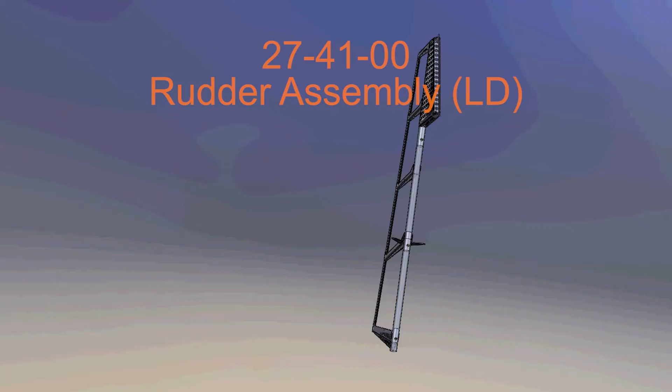In this episode, we're going to assemble the low drag rudder assembly. The estimated build time for the low drag rudder assembly is from 2 to 4 hours. The rudder assembly components are manufactured using a CNC match drilled system. This ensures a proper fit, easy assembly, and minimizes construction time.

In the previous episode of Building the EMG6, we assembled the rudder spar subassembly. We did this by inserting 3 inserts into the spar, positioning them, and riveting the rudder hinge nut plates in place to hold these inserts. The construction procedures assume that you have completed these steps or have purchased the pre-assembled rudder spar. To get started, we need to have an overview of what we're going to be working with.

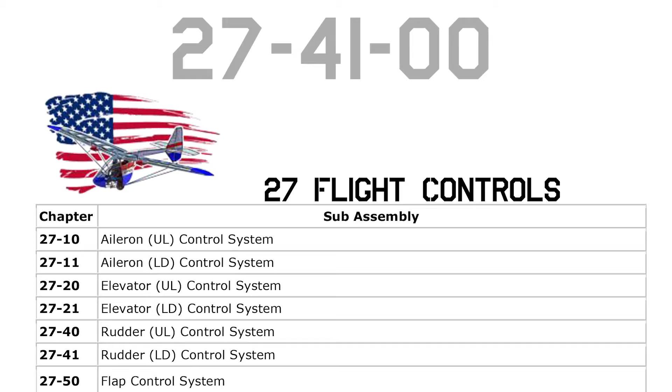The part numbering sequence in the aircraft uses a version of the ATA code. The first 2 digits in the numbering code system identify the primary segment of the aircraft. In this case, 27 indicates that this is part of the flight control system. The second 2 digits indicate in the part numbering system the primary subassembly. In this case, 41 is the code for the low drag rudder assembly. The remaining digits identify the individual parts within that subassembly.

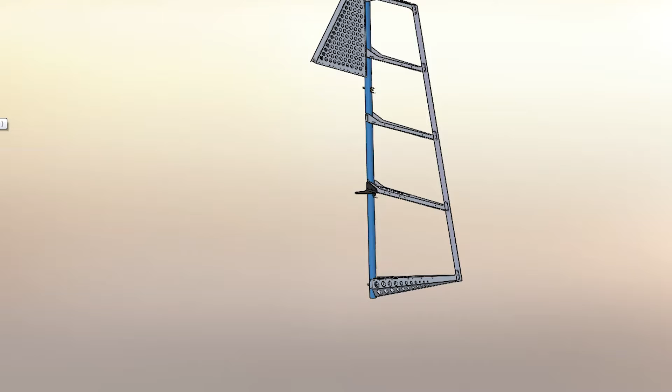So let's go over each part individually so you can get an idea of the makeup of the individual parts within the subassembly. Dash 10 is the rudder spar. Dash 50 is rib number 1 located at the bottom of the rudder. Dash 51 is the number 1 rib support, which ties the 2 legs of rib number 1 together, forming a box structure. Dash 65 is the trailing edge.

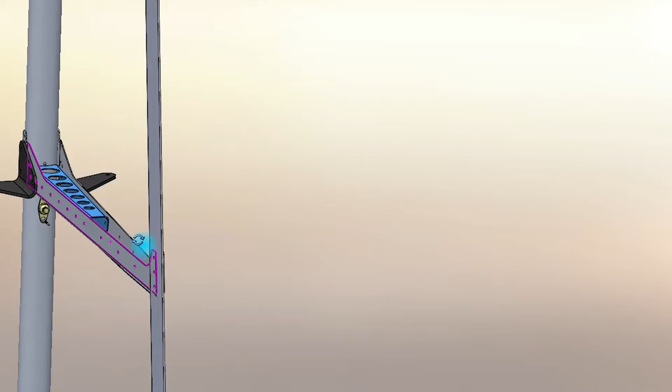Dash 53 is rib number 2 on the left side, and dash 54 is the number 2 rib on the right side. All of the remaining ribs aft of the spar are made up of both a right and a left side that are riveted together. Dash 55 is rib number 2 support, which forms a box structure for the control horn to attach to the rudder assembly. Dash 20 is the right and left rudder control horn assembly, which will be bolted to the frame after covering. Dash 56 is rib number 3 left. Dash 57 is rib number 3 right.

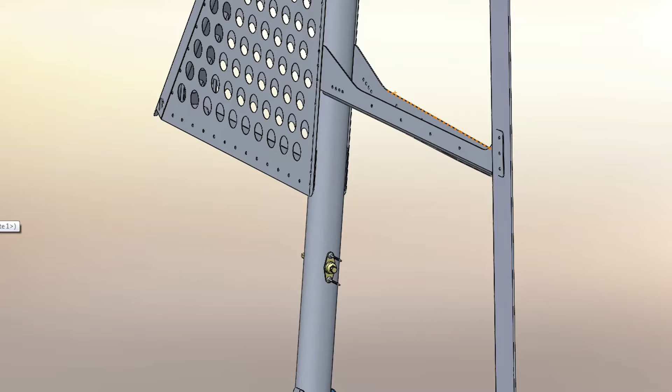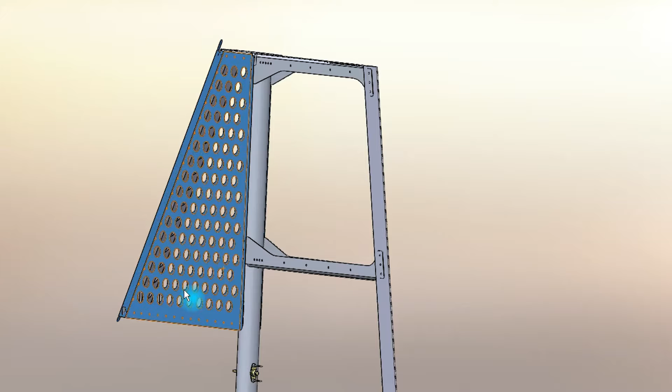Dash 58, rib number 4 left. Dash 59, rib number 4 right. Dash 60 is rib number 5 left, and dash 61 is rib number 5 right. Dash 76 is the leading edge sheet metal with multiple lightening holes in it. Dash 72 is rib number 6, which is the rib for the leading edge top, and dash 73 is rib number 7, which is the rib for the leading edge bottom.

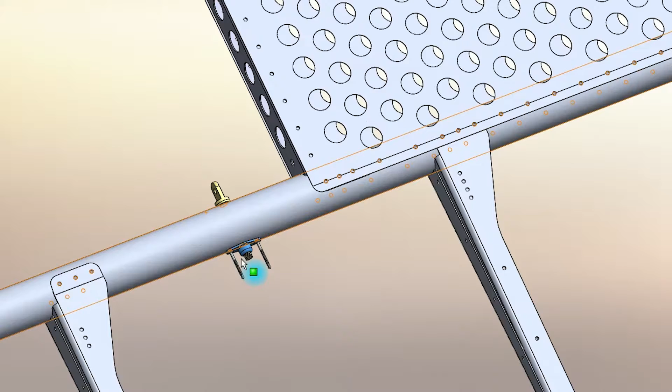Within the spar subassembly, we have a few more components. There are 3 each of the MS21078-4 nylock nut plate, and then we have 3 AN960-416 1/4-inch washers and AN43B-20A eye bolts, and these are the eye bolts that form the hinges for the rudder assembly.

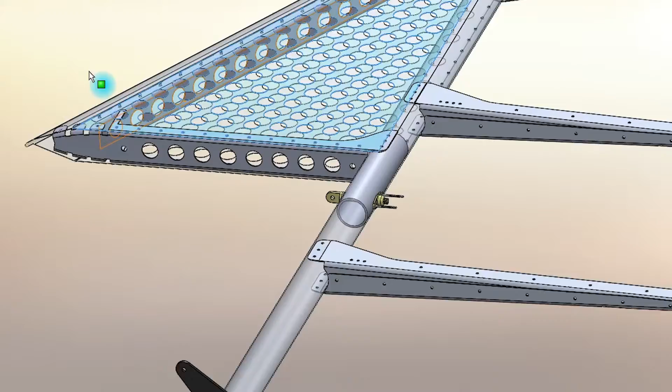The rudder spar assembly includes the dash 10 rudder spar, and then dash 12 the rudder mid support, dash 13 is the rudder spar lower support, and dash 14 is the rudder spar upper support. And last but not least, we have dash 77, which is the leading edge spar.

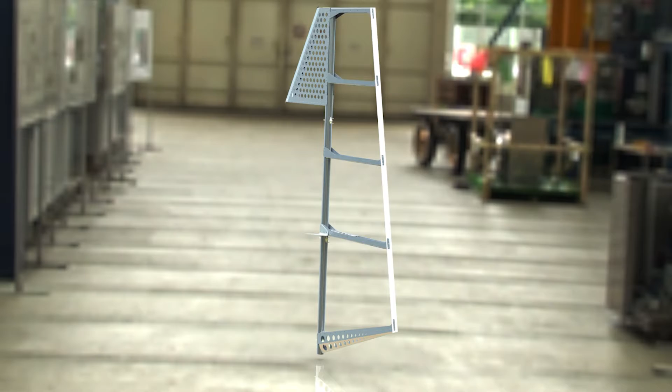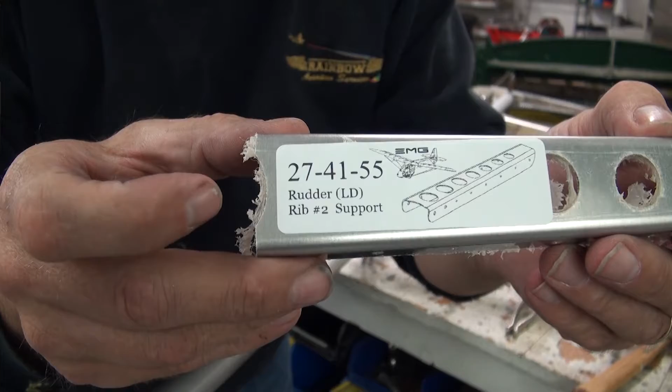Now that we have an overview of the rudder assembly, let's talk about a few builder's notes. There will be multiple drawings that you will want to reference, all of which are available in the builder's database under Chapter 27-41. All of the components in the rudder kit have an identification label which identifies the part number, which includes a subassembly for which each part belongs to. In addition, there is a picture of the particular component on each label.

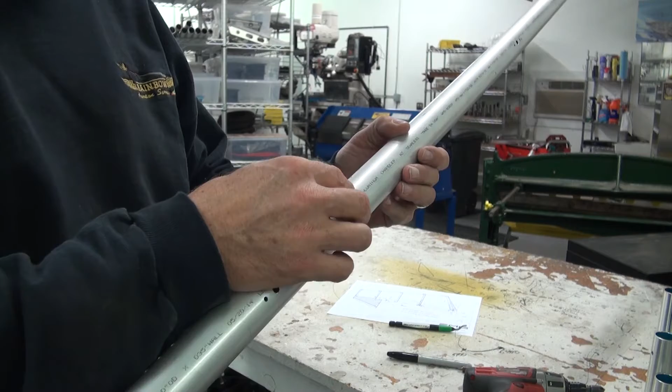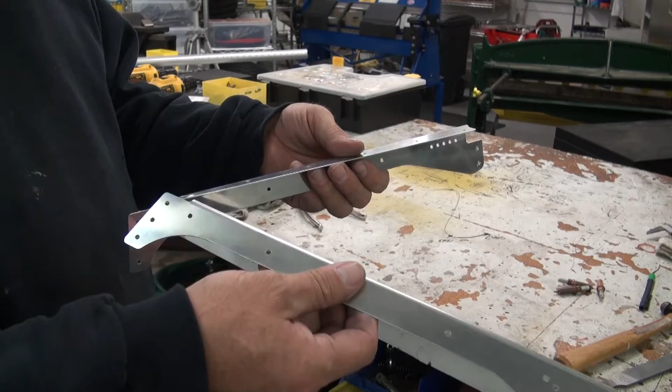Most of these labels are placed in a manner so that they're easy to remove from the component. In many cases, the label will simply come off when the plastic is removed from the sheet metal. You may find it helpful to stick the labels to the workbench as you remove each one, as they also provide a visual picture of each part number that may be helpful in identifying the parts as the labels have been removed. Ribs 2 through 5 consist of two-piece ribs, both left and right. In order to help with the orientation and identification of each rib after the labels have been removed, there is a coding system built into each rib.

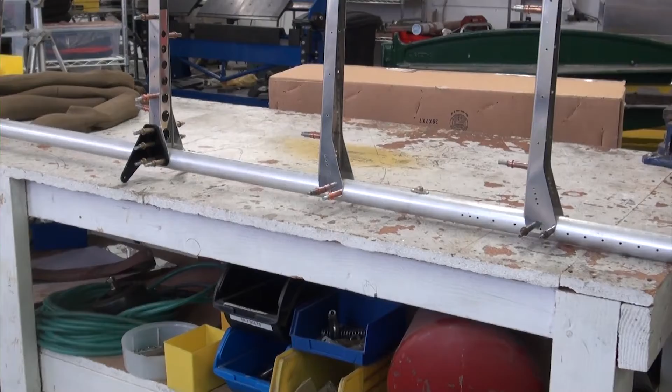Each rib has an identifier on the forward side of the rib that identifies the rib number by the number of holes that are drilled into the aluminum. For example, rib number 3 has 3 holes, and rib number 4 has 4 holes, and so on.

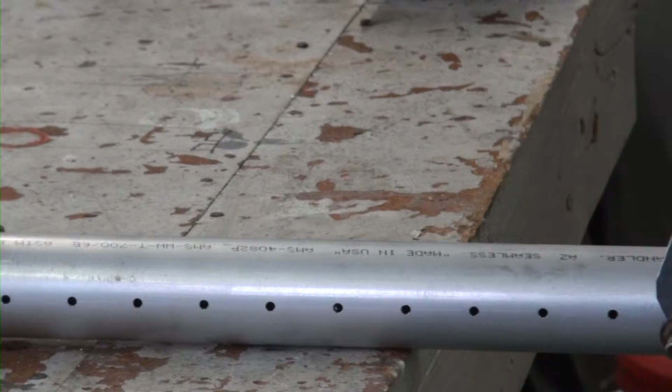In addition, the ribs that are located on the right side of the rudder facing forward have all of the identification holes drilled at an angle, whereas the ribs on the left side of the rudder have all of the rib identification holes drilled parallel with the rib.

Before we can begin assembly, we need to do one more modification to the rudder spar. Because of the radius of the bend on number 5 rib, there's an interference between rib number 5 and the top of the rudder spar. We simply need to provide a small amount of clearance by filing or sanding off the outside edges of the rudder spar.

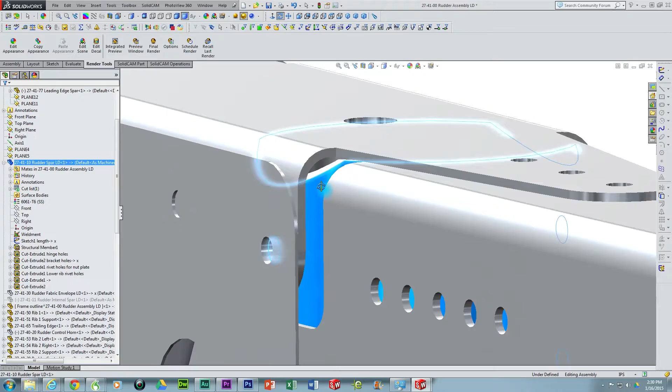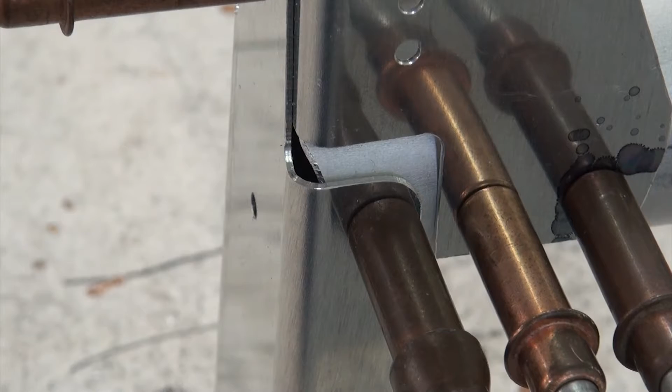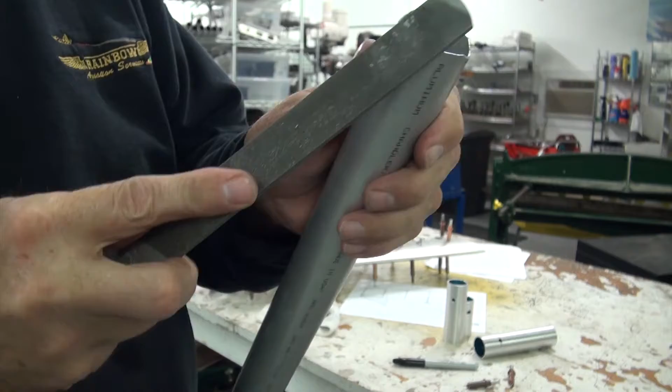A radius or chamfer of just over 1/8 of an inch will provide plenty of clearance. Once you have removed this material, deburr the end of the spar. Now that this is complete, we are ready to begin the assembly process.

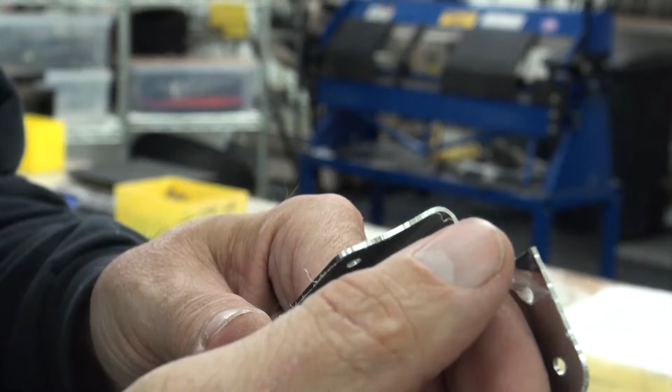We're going to start the process of assembling the rudder, starting with the very top rib, rib number 5, and work our way down to the bottom, which is rib number 1. We will start with rib number 5 working the process completely, and then we'll duplicate the process for the remaining 4 ribs. First, we will remove the plastic material from each side of the rib sheet metal piece.

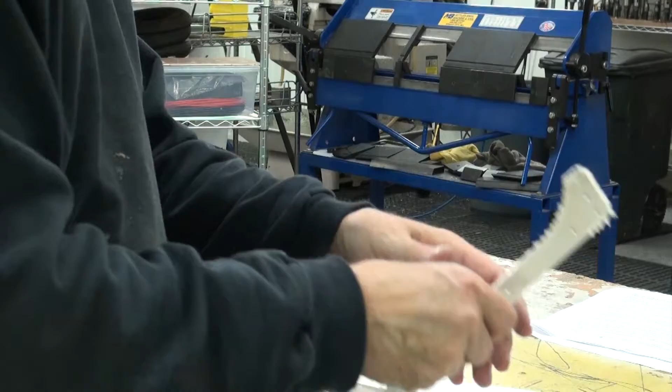You can simply grab the edge with your fingernail, peel it back a little bit, get it started, and then with a nice even pull you can get the plastic off relatively easily. Then we'll need to do the other half of the rib.

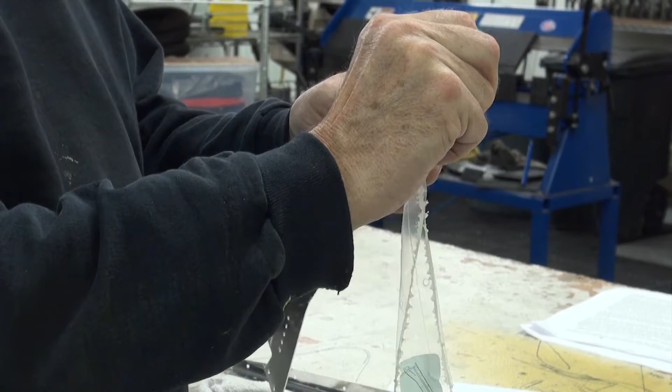Once this is complete, the next step is to deburr each one of the pieces in their entirety. There's many different methods for deburring, and you can refer to the deburring video if you need additional help with these procedures. Once we have both the right and left side of the ribs deburred, we can cleco them together to form a single rib as shown here.

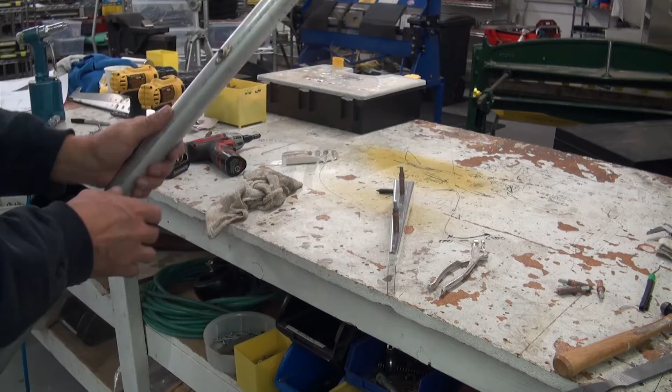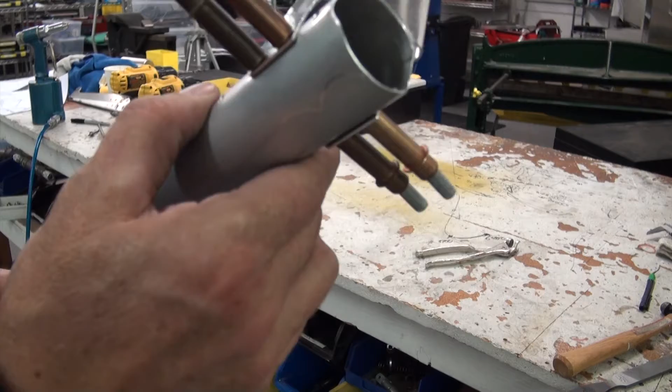Now, utilizing our spar with the nut plates oriented towards the aft portion, we can cleco the rib in place using 2 1/8 inch clecos on either side to position the rib correctly. We now have the tip rib, rib number 5, completed and installed.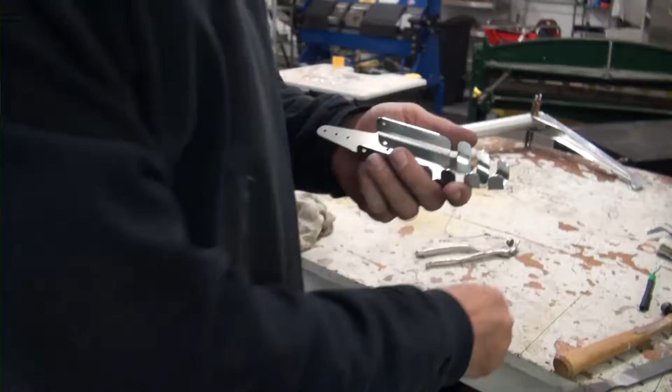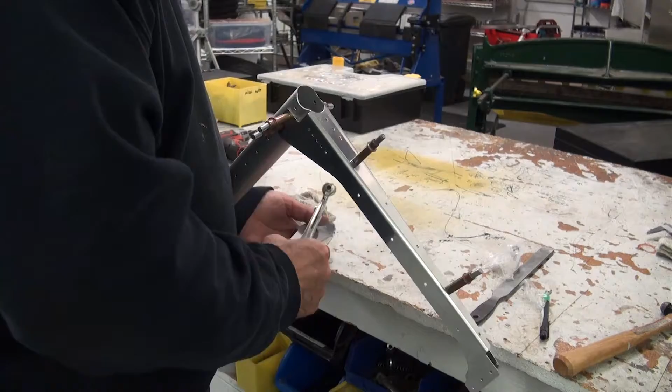It is now time to join rib number 6 to the rudder spar and rib number 5, completing the upper rib portion of the rudder assembly. Once again, we deburr the edges and the holes of rib number 6 before installation. And then we will use 2 clecos to join rib number 6 to rib number 5 on the top of the rib, and then 2 clecos to attach rib number 6 to the top portion of the rudder spar.

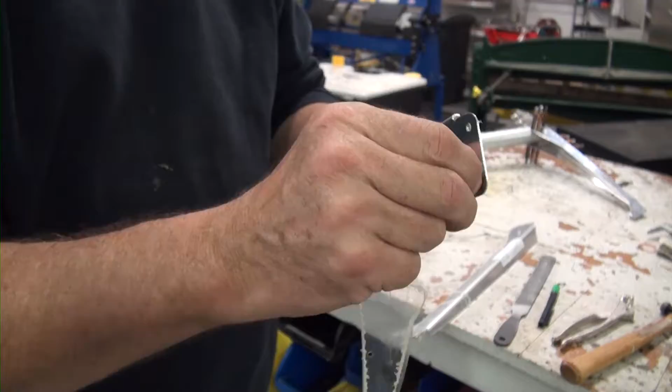Now that we've completed rib number 5, we're simply going to duplicate the entire process for rib number 4. We will identify the proper part number for each rib, remove the plastic, and then deburr both the edges and the rivet holes.

Next, we can either assemble the rib completely and then cleco it onto the spar, or we can do as we're doing in this section here, and we're doing one half of the rib at a time, and then once both rib halves are clecoed to the spar, we can rivet the two rib halves together.

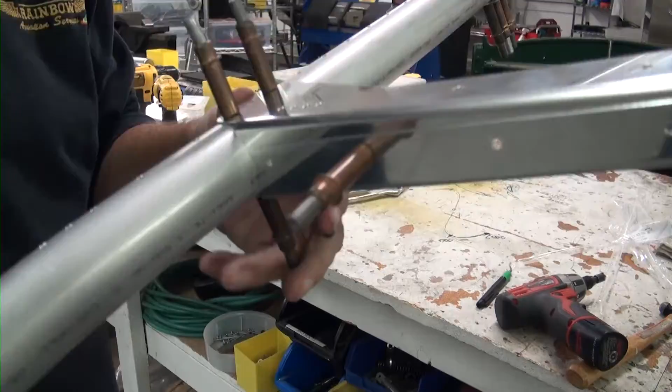Next, we'll proceed on to rib number 3 and then on to rib number 2 using the same basic procedures.

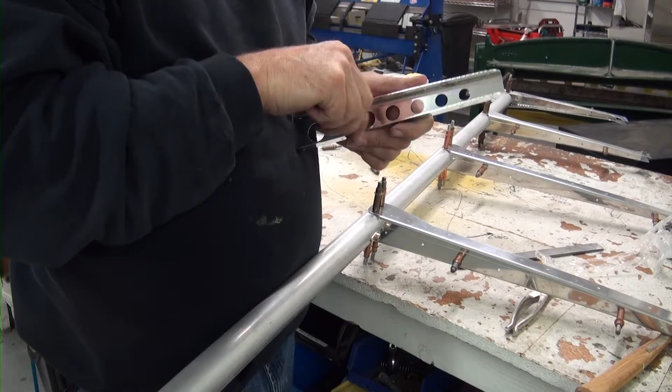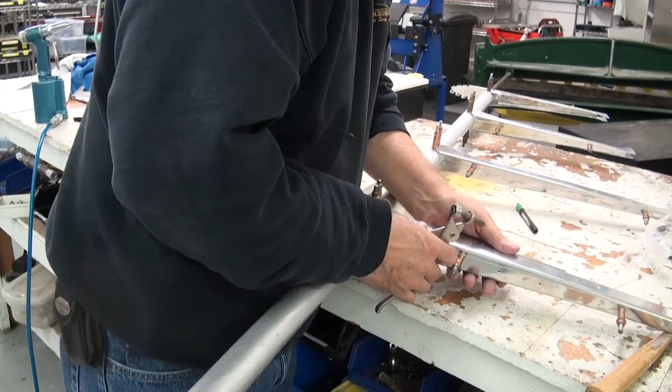For rib number 2, we will proceed the same as we have for rib number 5, 4, and number 3. But we have an additional component to add to this rib assembly. Rib number 2 has a support rib that bridges the two legs of the rib together to form a structural box that the rudder control horn assembly will attach to. We will take the number 2 rib support and prep it for installation, and then cleco it in place.

Next, we will install the rudder control horn onto the forward spar and the rib number 2. We will be drilling the spar holes with a 3/16 inch drill bit, and then the first 2 holes in rib number 2. In the final assembly, we will be attaching the rudder control horn with 4 AN3 bolts, but for now we'll simply use 3/16 inch clecos to hold it in place. The rudder control horn will be installed permanently after the rudder assembly has been covered with fabric.

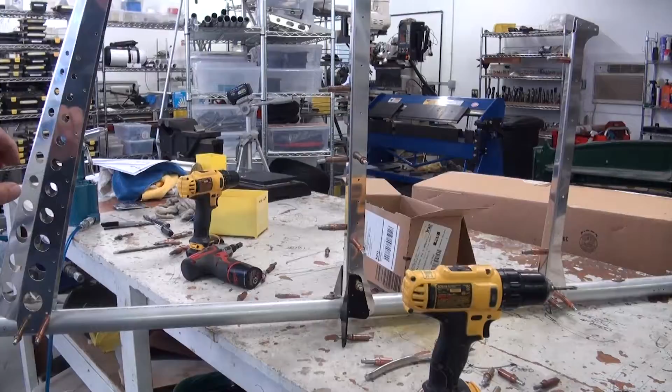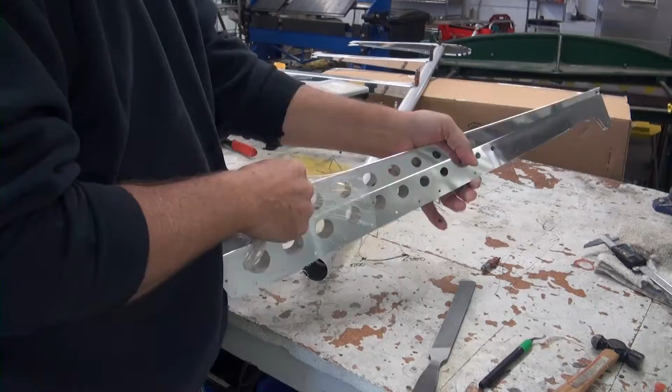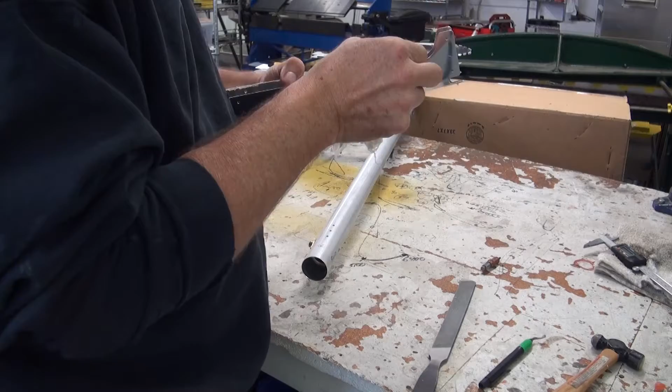Rib number 1 is a little bit different than the rest of the ribs, as it is a single piece rib that is already pre-bent into the final shape. The procedures are, however, very similar to the rest of the ribs. Remove the plastic, and then deburr both the edges and the holes in the rib.

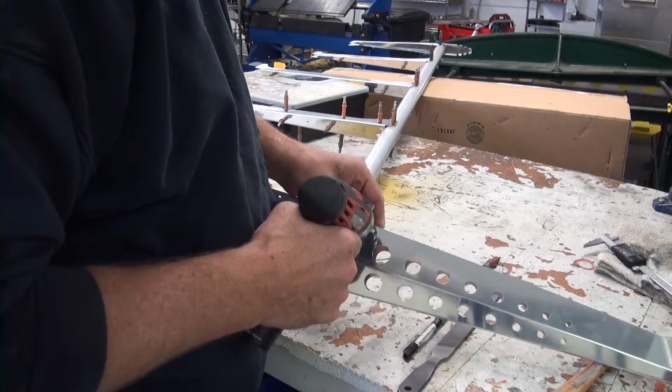On rib number 1, there is an alignment tab that is used for the manufacturing process to position the rib correctly in the CNC press brake during the bending process. This tab is intended to be cut off before you can install it onto the spar. Simply take a pair of sheet metal shears and trim the tab on the inboard end. There is an additional tab on the outboard end, however this end does not need to be trimmed. Once you've got the tab off, you should use a file to smooth and deburr the area where you've cut it. Next, we will install the rib number 1 onto the spar using 2 clecos on either side.

Rib number 1, just like rib number 2, has an internal support rib that ties the two sides of the rib together. Deburr and cleco this in place as shown in the drawings.

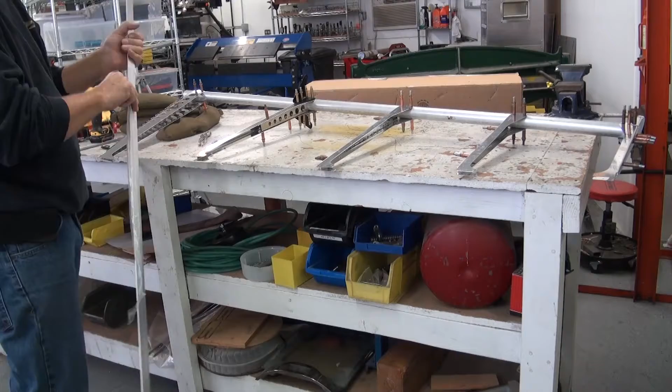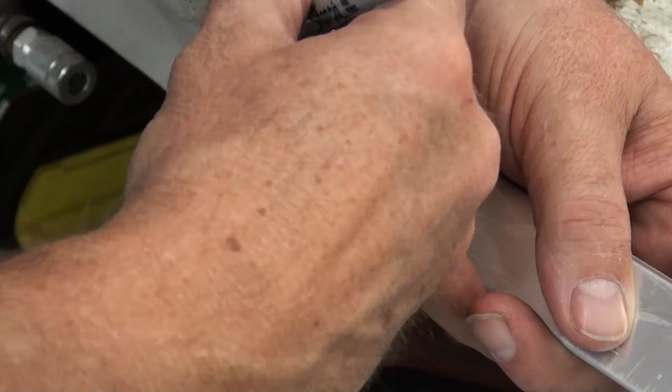Now that we have all of the ribs aft of the main spar installed, we're ready to install the trailing edge. You will want to remove the plastic from the trailing edge, and remember that there's also plastic on the inside, and you might as well go ahead and remove it now so that it's not floating around after the airplane's been built. You'll want to trim the lower section of the trailing edge material so that it matches the profile of number 1 rib. You can mark it and then cut it with a bandsaw, hacksaw, or even just sand or file it to the proper profile.

Next, we're going to insert the trailing edge material in between each of the rib mounting sections. Start by measuring to ensure that the trailing edge is the proper distance away from each of the aft sections of each rib to ensure that it's parallel with the rib tabs. Notice that there is a difference from the right side to the left side on the distance of the ribs to the trailing edge. The reason for this is to offset the rivets so that they don't interfere with each other.

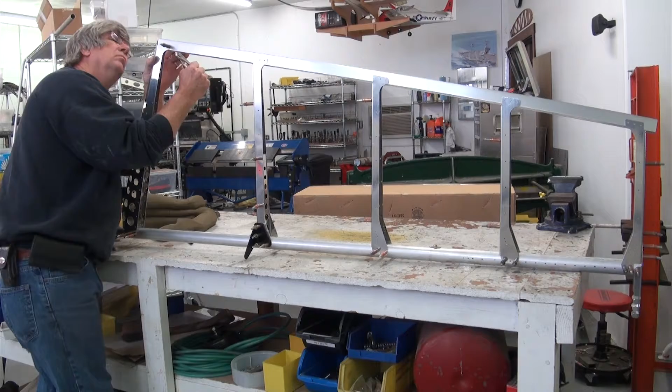Now sight down the length of the trailing edge to ensure that it's centered on the rest of the rudder rib structure. Then drill and cleco the trailing edge to the number 1 rib on both sides. Then proceed to rib number 5 and drill and cleco that, ensuring that it is also centered during this process. Next, you could drill 1 rivet hole in each of the remaining rib tabs on either side of the rudder, simultaneously ensuring that the rudder trailing edge has no twist and is properly centered.

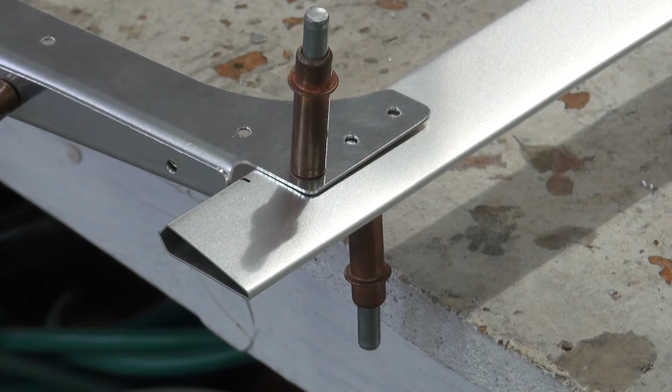When we began the installation of the trailing edge, we aligned it with rib number 1. This leaves us a little portion of trailing edge material sticking out past the top of rib number 5. This will need to be marked, cut, and trimmed to fit flush with the profile of the top rib.

The last rib that we have to install is rib number 7. This is the leading edge lower rib, and we'll use the same procedures that we did for all the other ribs. Just simply deburr and then go ahead and install it. It should be installed with the flanges facing upward.

We now need to prepare the leading edge for installation onto the rest of the rudder assembly. Once again, we will deburr the edges, the lightning holes, and the rivet holes. Next, we will prepare the leading edge spar by deburring it. Once we have the leading edge spar deburred, we will need to cleco it in place. We will need to have a cleco about every 3rd to 4th rivet hole.

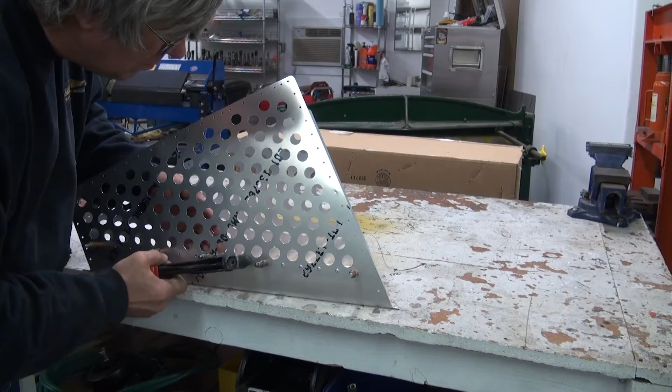Now it's finally time that we get to start installing some rivets. We can use a hand pop rivet gun, especially on something as small as this rudder assembly because it has a relatively limited number of rivets. But if you've got a bigger job ahead, it's nicer to have a pneumatic rivet gun to work with.

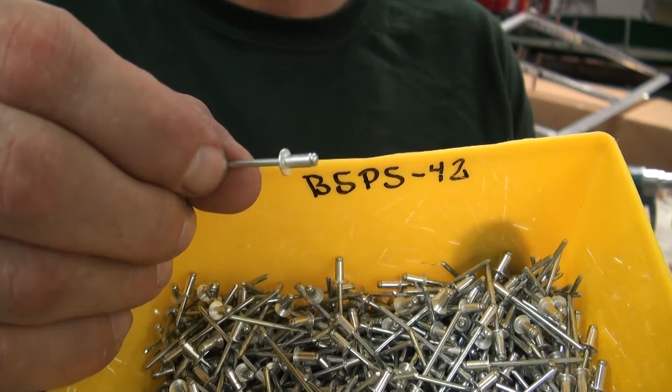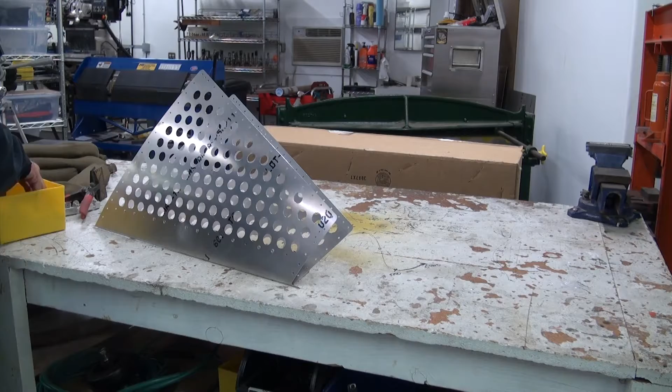We're going to be installing the leading edge spar with 1/8 inch aluminum pop rivets, and these will be part number BSPS-42. Install all of the pop rivets between the clecos, ensuring that you have good pressure to close up the gap between the two pieces of sheet metal. Once you have filled all the holes between the clecos, remove the remaining clecos and install the rest of the rivets in the remaining holes.

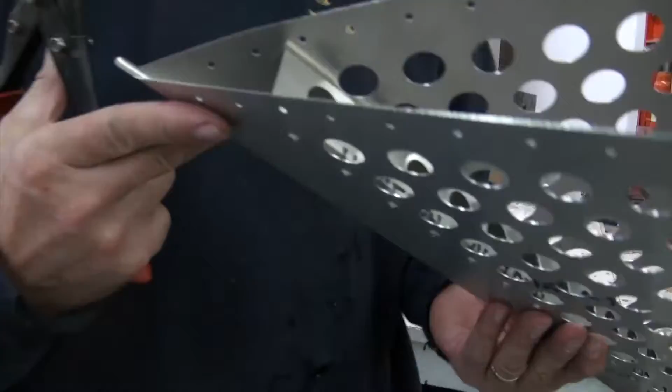Next, we want to trim the manufacturing tabs from both ends of the leading edge skin. Trim off the tabs using a pair of tin snips. Then, using a file, smooth out and deburr the rest of the leading edge.

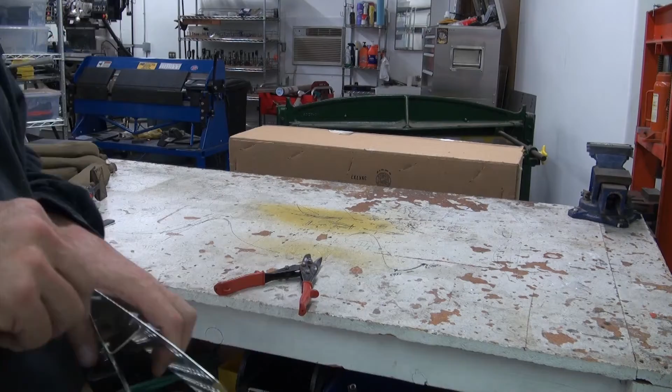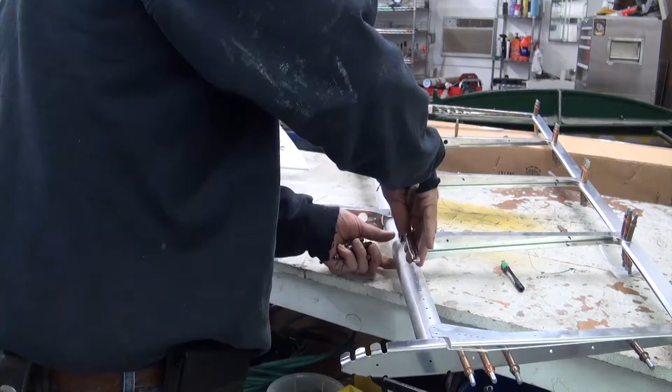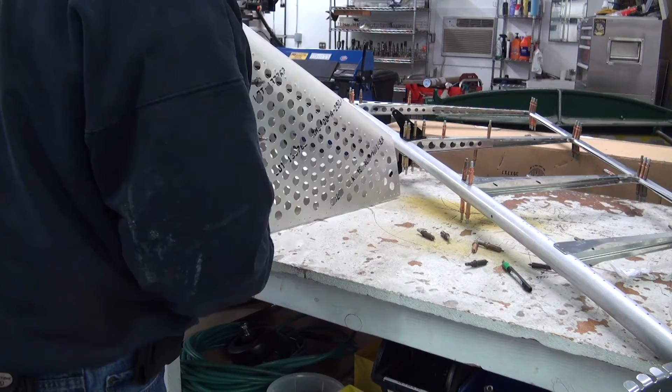Next, we will want to remove all of the rivets that hold the ribs in place where the leading edge skin will be attached. You can go ahead and remove rib number 7 from the leading edge as well and position it into the lower portion of the leading edge skin and cleco it in place. Once again, place the clecos every 3 to 4 rivet spacing.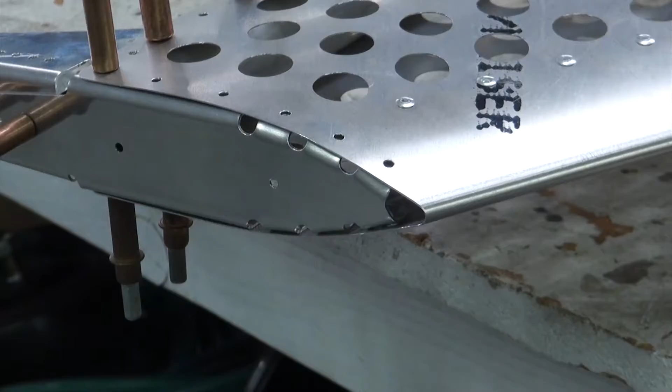Now position the leading edge skin in place and secure it to the spar, ensuring that you have at least a couple of rivets in each one of the rib locations. Align and drill any remaining holes in both rib number 6 and rib number 7 and secure them with clecos as well.

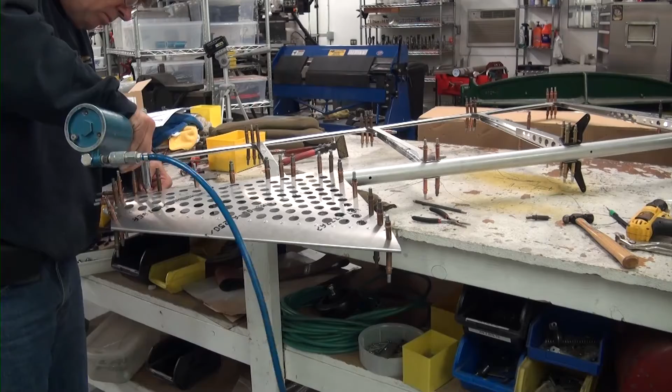Next, we can start riveting the leading edge skin to the structure. Once again, we will be using BSPS4-2 aluminum pop rivets in most of the locations where the leading edge skin goes through another single layer of aluminum. The areas that will not receive these rivets are anywhere where the skin, ribs, and spars are joined together. We will use stainless steel rivets in these areas after we've completed the other steps in the construction.

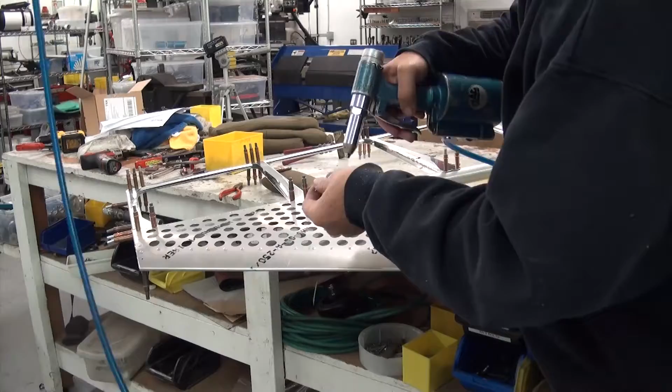Once we've installed all the rivets, remove the remaining clecos, except those at the rib locations, and install the remaining aluminum pop rivets. On occasion, you may run across a location where rivet holes are not aligned perfectly, and you may need to simply run a drill through to clean up the hole. Use a number 30 drill bit.

Next, we will move on to the trailing edge and install the BSPS4-2 aluminum pop rivets into the rivet hole locations, removing one cleco at a time during the installation process. Then remove the remaining clecos and install rivets in those holes.

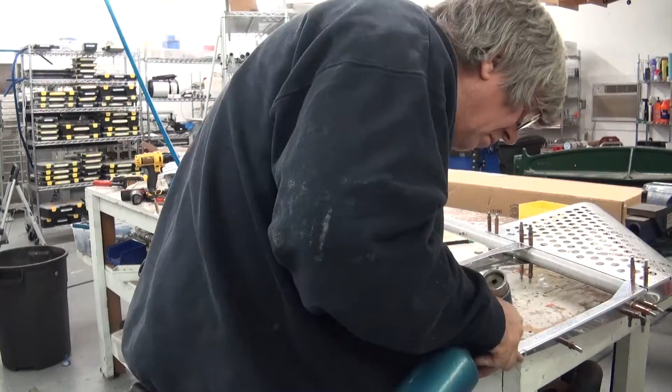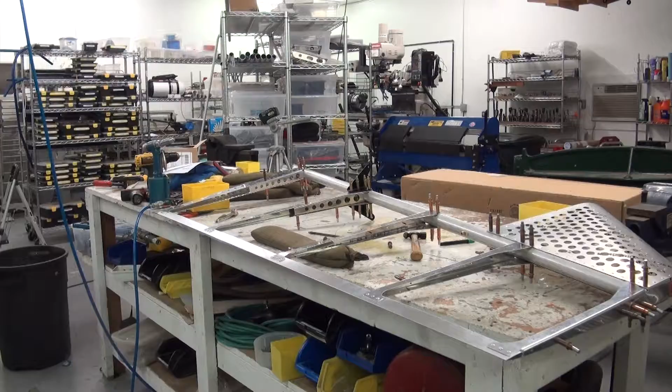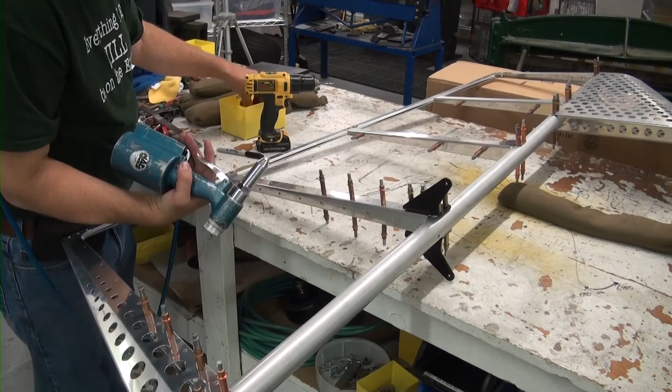Now that we have installed all of the aluminum pop rivets, it's time to proceed on to the installation of the remaining pop rivets. At each one of the rib locations, the stresses are higher and require stainless steel pop rivets. We will be using CCP 4-2 or 4-4 stainless steel protruding head pop rivets, depending on the thickness of the materials being joined together. Refer to the drawings if you're unsure about which holes require which stainless steel pop rivets.

We will begin by joining the rib halves together using CCP 4-2 rivets. In the areas close to the spar, you may need to use a hand pop rivet gun in order to get enough clearance to access the rivet right next to the spar.

The rivets located where rib number 5 and 6 are joined together and the rib spar locations will require CCP 4-4 rivets. Remove 1 or 2 clecos at a time, leaving at least 1 cleco in each rib during the installation process to ensure proper alignment.

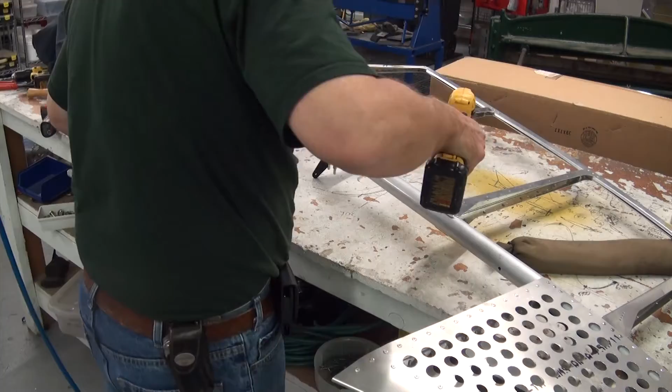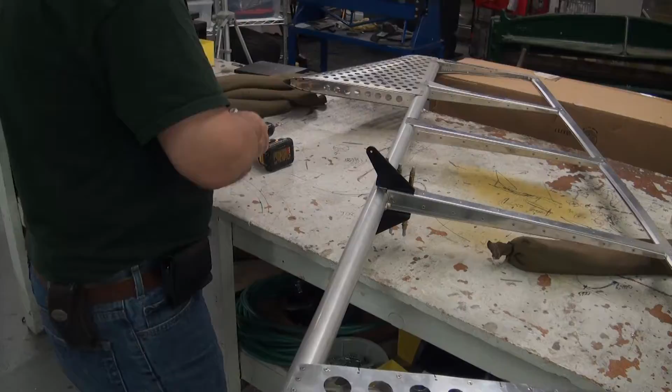We have now finished the construction of the rudder assembly and are ready to proceed to the covering process. Remember that the control horns will not be installed permanently until after the entire rudder has been covered. The final weight of the entire rudder assembly should weigh less than 5 pounds.